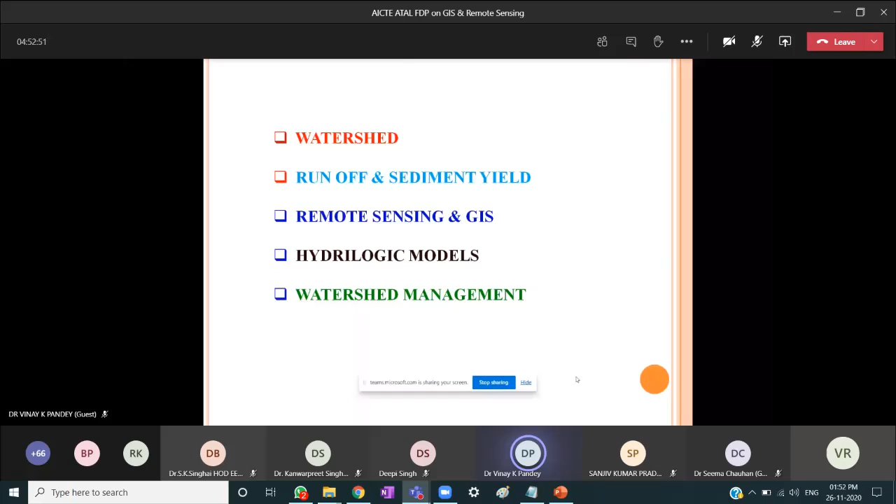So initially, I know personally, about 30 years back, for watershed planning, we were making a contour survey. Then after the contour map, we were generating a soil map, then revenue map, present land use map, and these 4-5 maps we were superimposing at the same scale to each other. Then we were developing a developmental plan. According to the developmental plan, all engineering and agronomical measures were planned. Their engineering designs were established. Their socio-economic conditions were analyzed. Then finally we were executing these engineering structures on the ground.

Now, slowly, on development of the technologies and the concept to execute the things in very less time with high efficiency and accuracy, we could get things like remote sensing and GIS. So when we use remote sensing and GIS technology, we can go for very high level accuracy in a very efficient way and with minimum time.

Now, today I'll not go on explaining the physics and theory of remote sensing. I'm not going to tell you much about the physics and theory of GIS. Most of the students, young scientists, and senior people are well aware of the remote sensing concept, its definition, its introduction, I suppose. Today we'll discuss only the application part of these tools and techniques for watershed planning and its management.

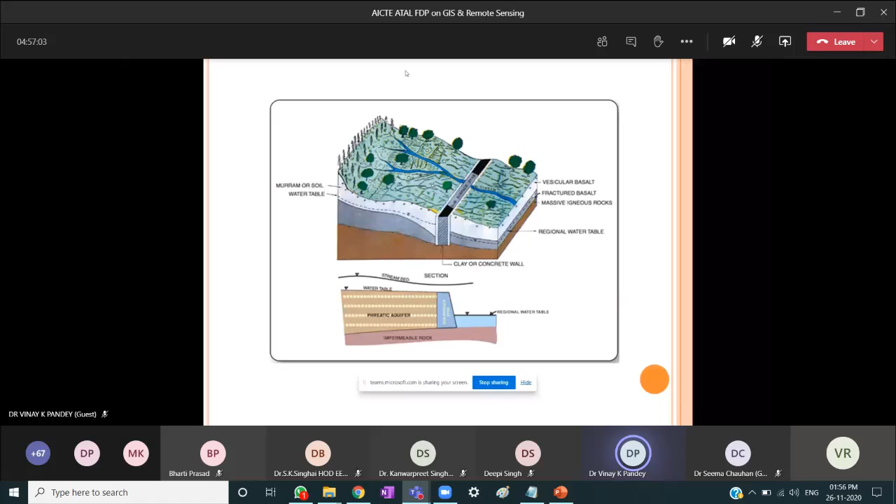Overall, for better conservation of the natural resources, we have to make a combination of engineering as well as agronomical measures. So watershed planning, as already stated, involves management of land, water, energy, vegetation resources with relevant scientific input appropriate to the socio-economic background for a pragmatic development. Ideally, it involves effective soil and water conservation measures, generating green cover such that load-free runoff is generated. Means within the runoff, there should not be much load of soil particles. So this way, a holistic development of a certain region is thought of.

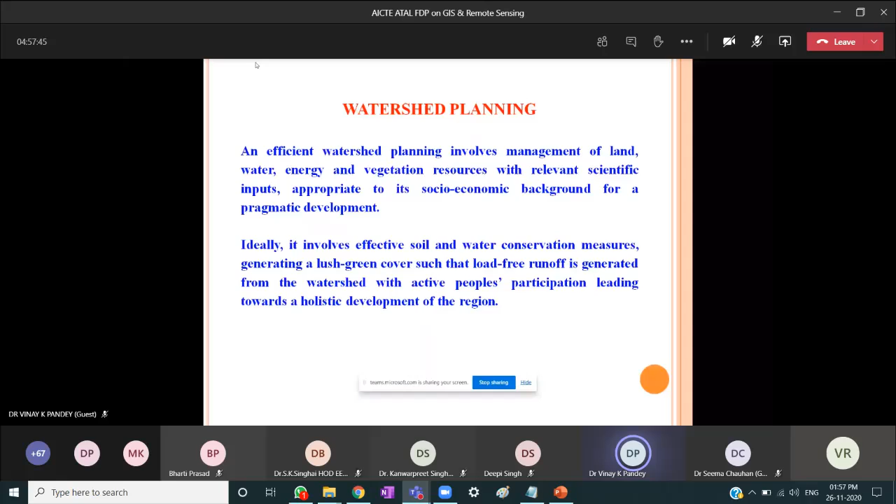So now we need certain basic information for better management of your watershed. So first, as we started with the remote sensing application, we need remote sensing data, in FCC form or digital form based on present availability. Then collateral data: meteorological data, soil data, crop and cropping pattern, vegetation cover, topographical features, present land use, groundwater, socioeconomic. So this way we need a series of data for its better planning.

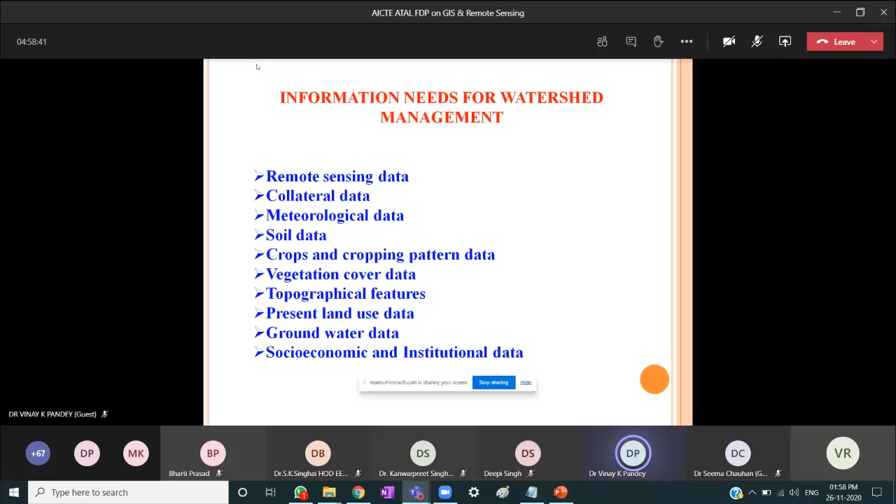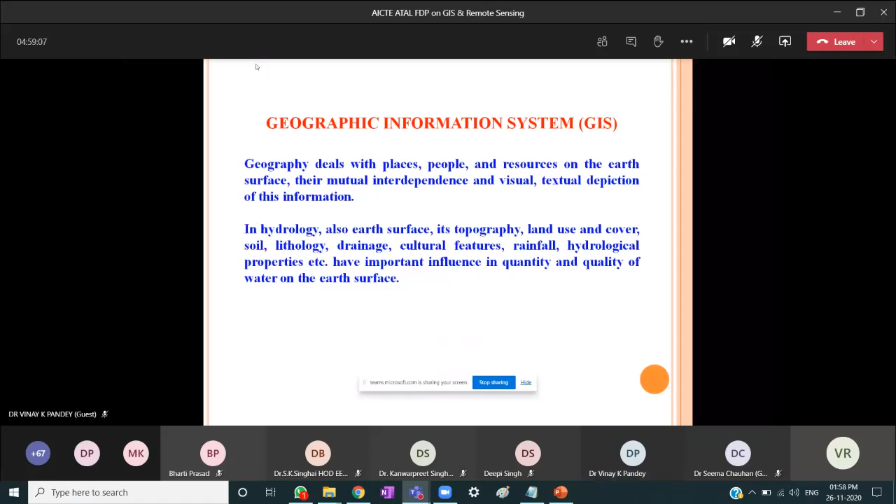Then if we discuss its role, remote sensing data from both aerial and space platforms offers a faster, efficient and reliable data acquisition technique. Remote sensing data have a unique character. It is the same database which is utilized by various thematic specialists, and hence it is of multidisciplinary utility.

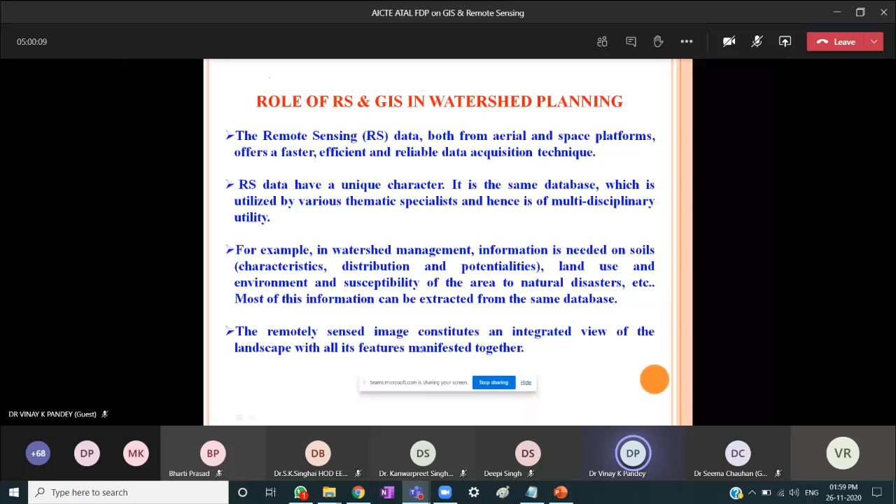Then remote sensing derived information can be merged and integrated with a conventional database using suitable software. Of course, some of the data we can collect from the ground, from the villages, and that information can very well be merged with the data available from the remote sensing images and the ground truth. Then these diverse data can serve as input and can be converted into a consistent map format, and this can be done in a very efficient and time-economical manner.

Then using suitable software, specific integration and analysis of these data can be performed within a very short time period to derive useful output in the form of maps and statistical data. Then GIS serves as an efficient system for compilation and presentation of this information in terms of maps, tables, graphs, etc.

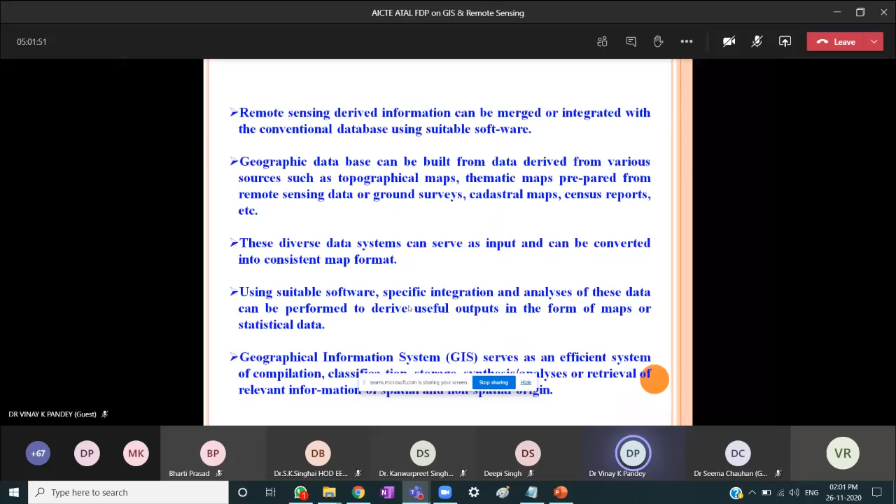So these are the two techniques. If you apply these techniques in watershed management and watershed planning, we can get things in a very timely and efficient manner, and that too with a high level of accuracy. Initially I showed you a picture of a watershed, how a watershed looks. It may be 5 hectare, 10 hectare, it hardly matters. But the broad technical concept is that it should drain at a common outlet.

So in front of you is a 3D view of a digital elevation model, and a digital elevation model is nothing but an outcome generated from the contour map using GIS. So if we develop a contour manually or digitally, we can transfer this database to the GIS platform and we can get a digital elevation model.

So you see, this is the lowest point in the contour. You are having the reduced levels. So this is the lowest. Of course, this is an example of a watershed. So this is the lowest point where water from all corners of the ridges collects and drains. So it has one outlet. Different colors show the different kinds of topographic signatures and features.

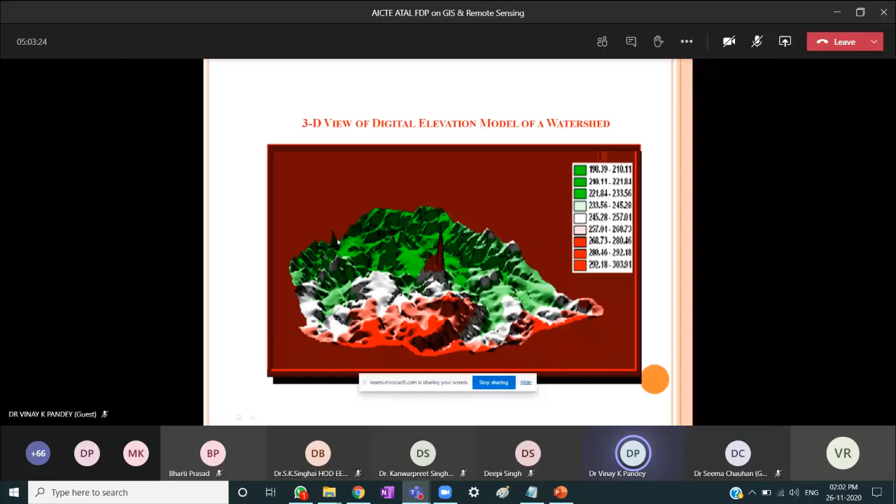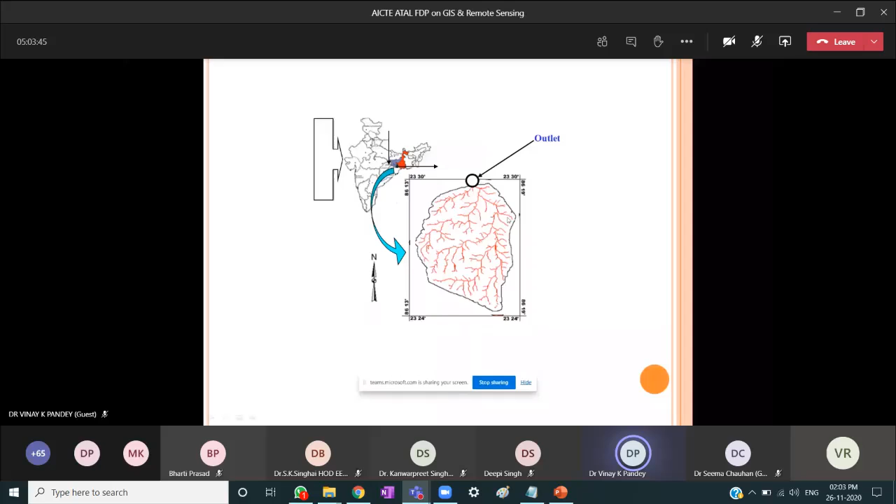Then this is another view of the same map. These are the drainage lines. So in a watershed, this is the outlet, this is the watershed boundary, and these are the drainage lines. Drainage lines are nothing but the pathways through which whatever water falls on the surrounding area drains through these small channels towards the outlet.

So after selecting a watershed, what information do we need to collect and analyze for its efficient planning? First is the location, longitude and latitude. Then what is the average rainfall of that particular area, the mean and maximum temperature, the relative humidity. So in this way, we need to collect the whole climatic information. Then of course we need to collect the topographic map, that is the toposheet.

Then we need to collect the soil map, because it's not possible for each individual, agency or organization to get information of all kinds. So we collect the soil information from the Soil Survey of India. We collect the toposheet from the Survey of India. We collect some basic information at the district and institution level. So this way, to generate different layers, we need to collect different kinds of information.

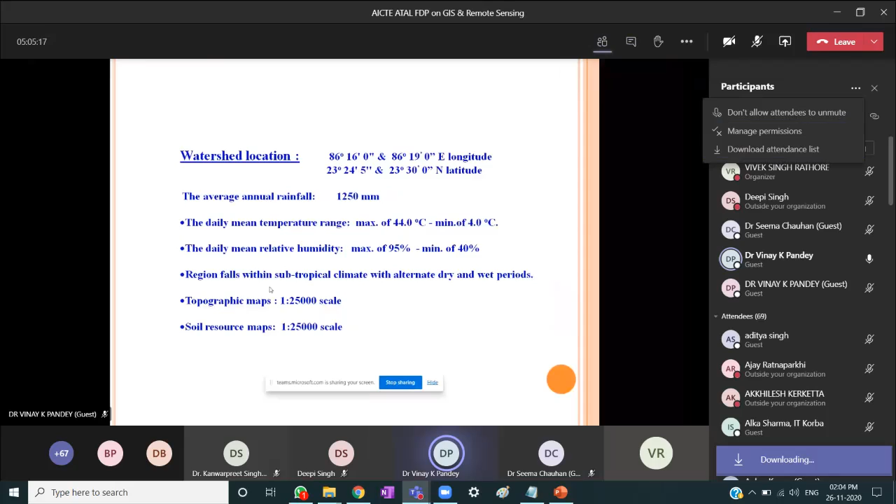So now see how these individual pieces of information slowly come onto a single platform, how they join to develop a developmental plan using remote sensing and GIS techniques. So this is the soil map, right? We collected the soil information from the soil survey.

If the area is big, then we have to collect it from the expert agency. If our area is small, no problem. We can take soil samples, analyze them in the laboratory, and after that we can prepare a map ourselves. So this depends on our capacity and the information and resources that we have with our organization.

So this is the soil map of this watershed area, and you see there are 1, 2, 3, 4 kinds of soils. Sandy loam is there, sandy clay loam is there, loamy sand is there, clay loam is there, and you see the different percentage of each soil. So the whole area is dominated by sandy loam soil, and this map is generated using the GIS platform, ArcGIS.

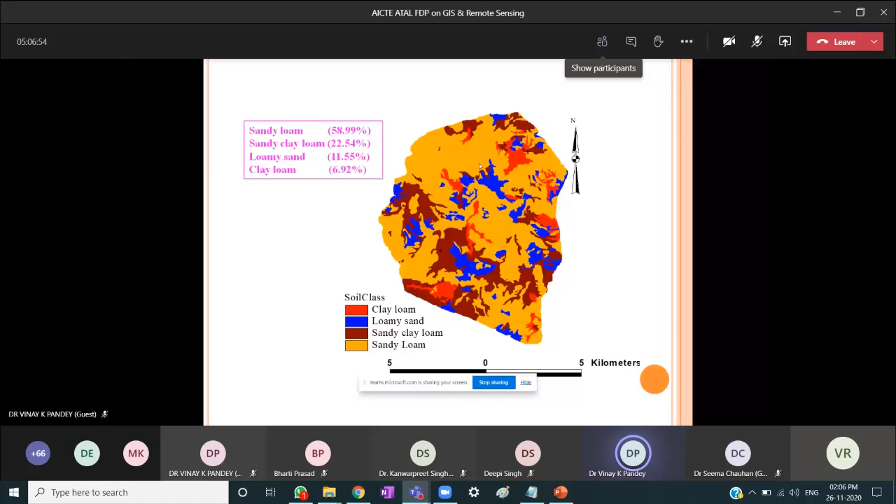So to generate this layer, we collected a soil map from the Soil Survey of India. We digitize, and after digitization, this soil map is generated. Then this is another soil map. We call it the soil series map. So in the soil series map, you see, these are Amara, Dumka, Heusala, Jalika. These are the local names of the soil series.

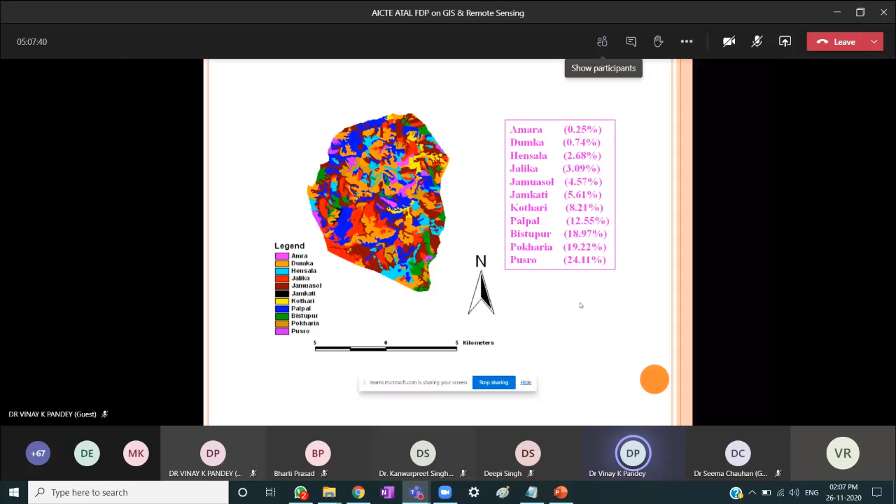Those names were initiated by the villagers some years back. So this is the soil series map, and all series belong to local nomenclature. So the same area has 4 soil classes, but 11 soil series. Then this is the soil class map. You must be knowing the soil classes. In total we have 8 soil classes, and the classification of soil is done based on its property and its suitability.

So here we get 1, 2, 3, 4, 5 soil classes. So class second, we have this much area. Class third, we have 30.69%. Class fourth, class sixth, and class eighth. So class eighth, we have 0.74% area. Means most of the area is suitable for cultivation, or you may say it has good soil. And class eight, which is almost barren land, is not suitable for cultivation. So the percent of that area in the watershed is very less.

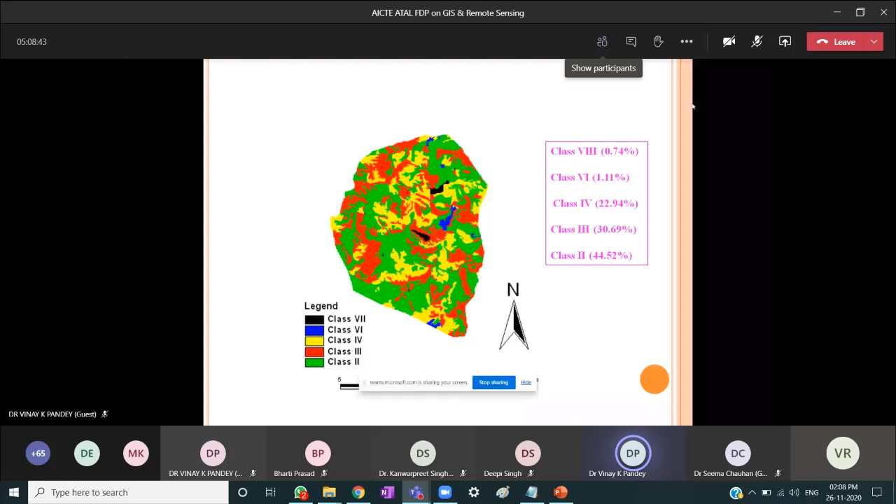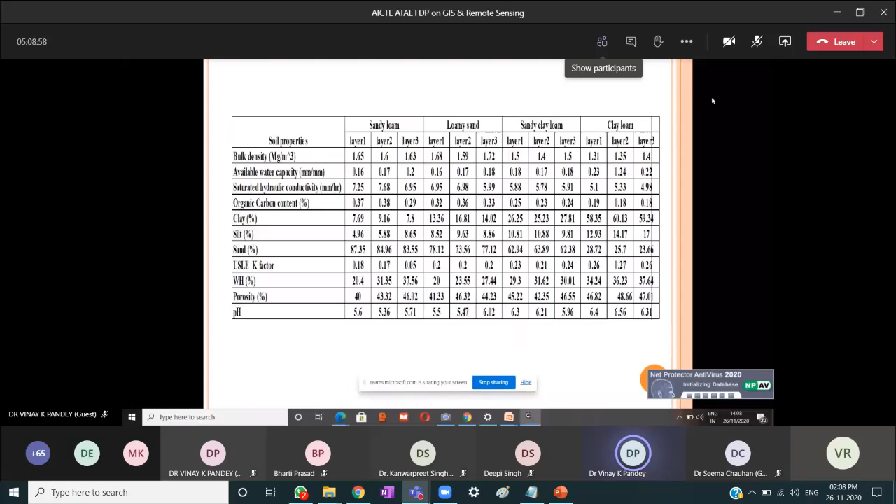So after doing this exercise, we have to analyze the soil properties: bulk density, available water holding capacity, saturated hydraulic conductivity, sand silt clay percentage, K factor, porosity, pH, etc. So for in-depth study, in-depth planning, we have to analyze the soil sample, and all these properties need to be analyzed in the laboratory.

Then another part is crop and vegetation. We have to visit the area. What kind of crops are being grown by the farmers? What kind of natural vegetation is there in the watershed area? So we need to record this information also, because each and every piece of information will affect the total generation of runoff and silt load at the outlet.

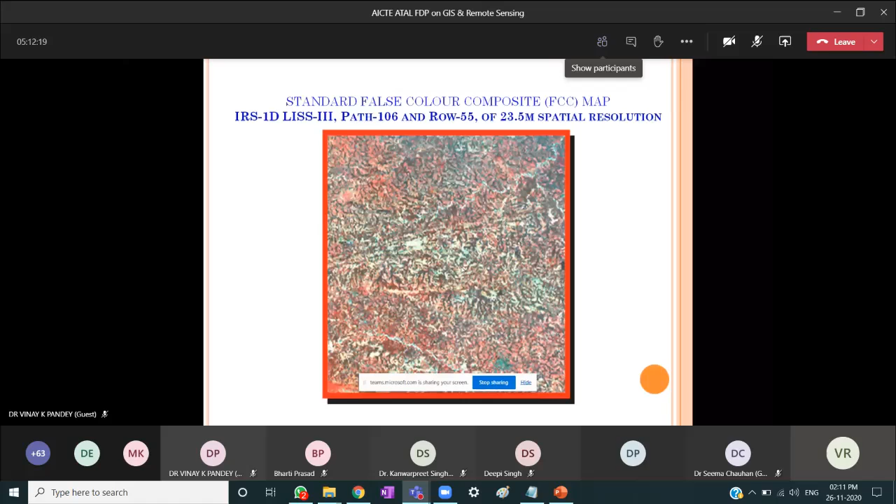We proceed with the digital data, remote sensing data. There are a number of softwares, number of techniques. So for example, if we go for multispectral classification, there are two: supervised and unsupervised. If you go into the theory of supervised, it will take more than a week to discuss. If you go for unsupervised, it will take more than 1 week. So we are not going into that much detail.

The idea is only how to take digital data and go for the classification. So either supervised or unsupervised or a combination of both, we take the images for classification. Then we go for the training stage, in which some statistical classifiers are used. Then the classification stage, the maximum likelihood classifier, we call it MLC, based on the estimate and Gaussian probability. So there are a number of basic theories and mathematical models on which these classification stages depend.

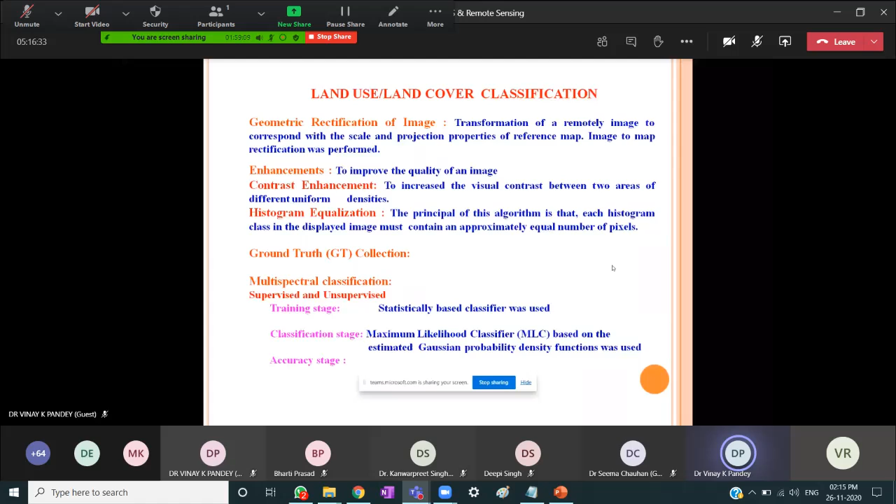So using these software and techniques, we go for the classification of the image, and then finally we go for the accuracy assessment, right? So classification is nothing but understanding or depicting the topographic signature, what is there on the ground. So this way, remote sensing technology is very accurate, is very fast.

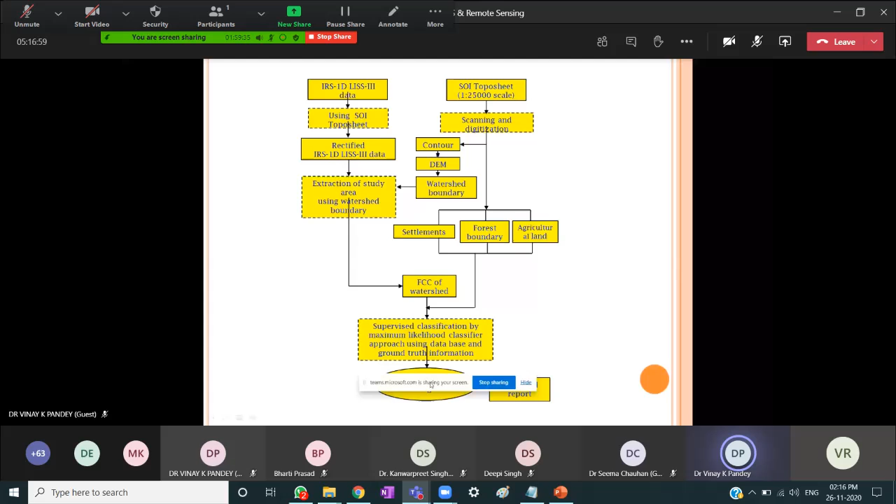So this is one example flow chart showing how we move step by step up to the classification. Starting right from the data, we get the final report and the maps of image classification. So this is the outcome after classification of images. So when we go for very accurate planning, we have to do the whole exercise for two time periods.

One for the calibration and another for the validation, because there is quite a possibility of human error, or n number of chances where there may be slight or more departure from the reality on the ground. So we take 1 year data for the calibration and another year data for its validation.

So this is the land cover classification map for the calibration year. Calibration year may be one pass, it's not the whole year. You must be knowing how satellite data is recorded from our country or from the world. There is a certain period when the satellite moves. It takes the data, that data comes to the ground station, and from the ground station, after certain rectification, it comes. So it's another process. We are not going to discuss the satellite technology. Our idea today is just the application of that technology in our watershed management, right?

So you see, after putting these digital images into the image classification software, we have got such a layer, and this layer shows different signatures: water body, lowland paddy, upland paddy, fallow land, upland, settlement, mixed forest, waste, etc. So after getting this classification, again we go to the ground for random checking whether whatever information we are getting is correct or there is some departure. So based on the ground truth procedure, we can correct this image.

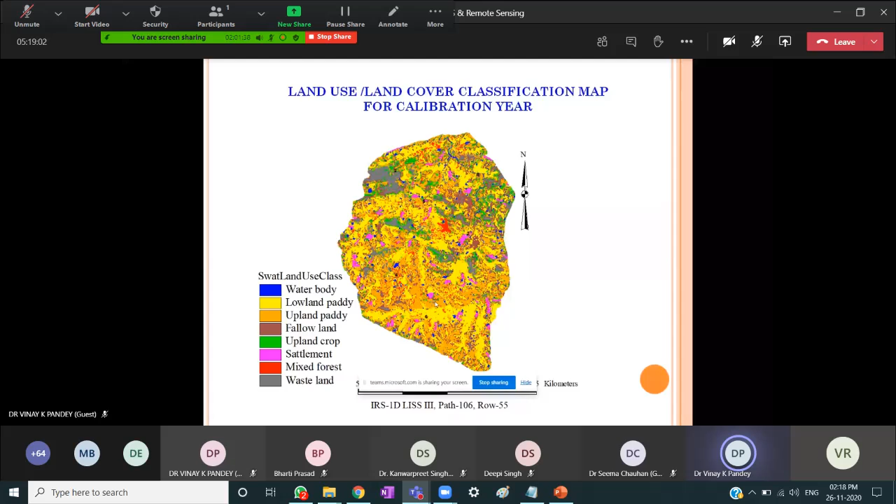Then for another image, for the validation period, we do the same exercise, and after doing this exercise, we go for generating a table. It is called the maximum likelihood report. So through this report, we can get information: for water body, what is the number of pixels, what is the area, how much percent of the image belongs to water body. So this information for the calibration year and another for the validation year.

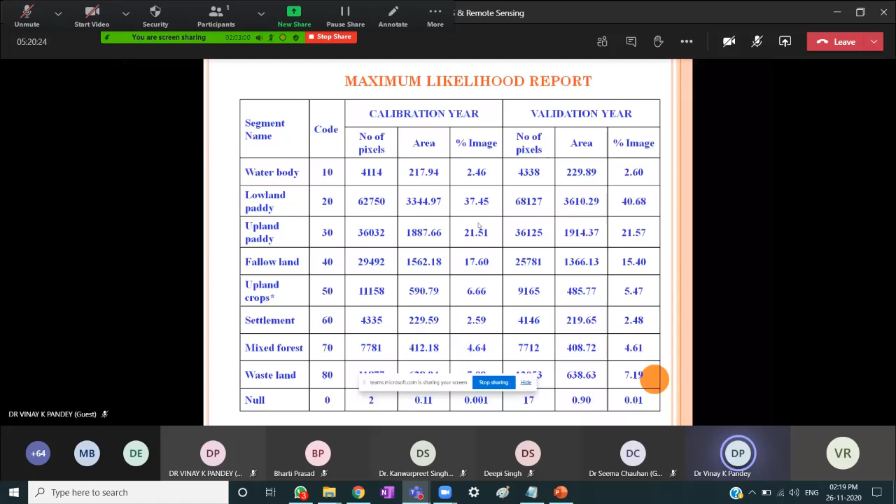So if you see this data area, this way we can say that of the whole watershed, 217.94 hectare belongs to the water body. So this way we can get the information about how much lowland paddy is there, how much upland paddy, how much fallow land, how much villages and city, roads, mixed forest, wasteland. So whatever information is there on the ground, after analysis we can get a precise record of that information through the software and satellite images.

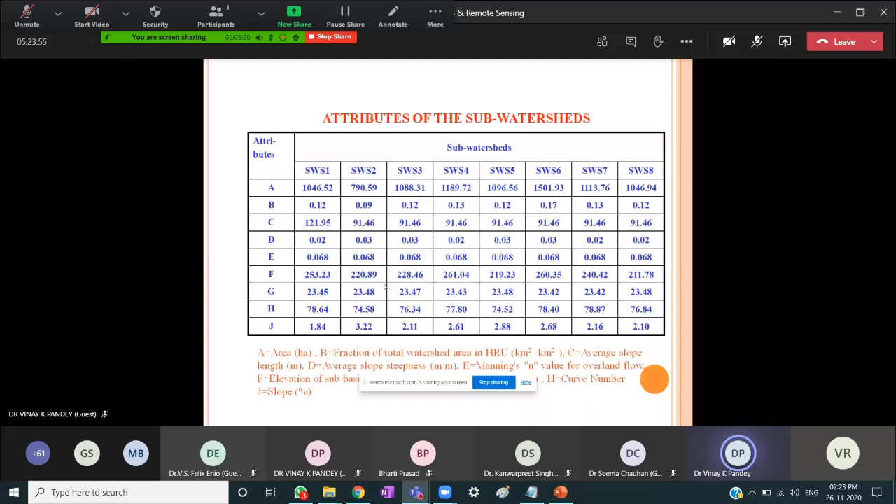Then sub-watershed wise land use and soil distribution. Of course, we need to have a soil map. So this is the soil information, land use cover information of the whole watershed. Then the question comes, we are showing stream order, now we are speaking about the soil. How within the same map? So it is generated because soil layer, contour layer, land use layer, revenue layer, all these layers we generate and superimpose in the same scale. So when we superimpose these layers in the same scale using certain software, whatever information is generated is sector wise, sub-watershed wise.

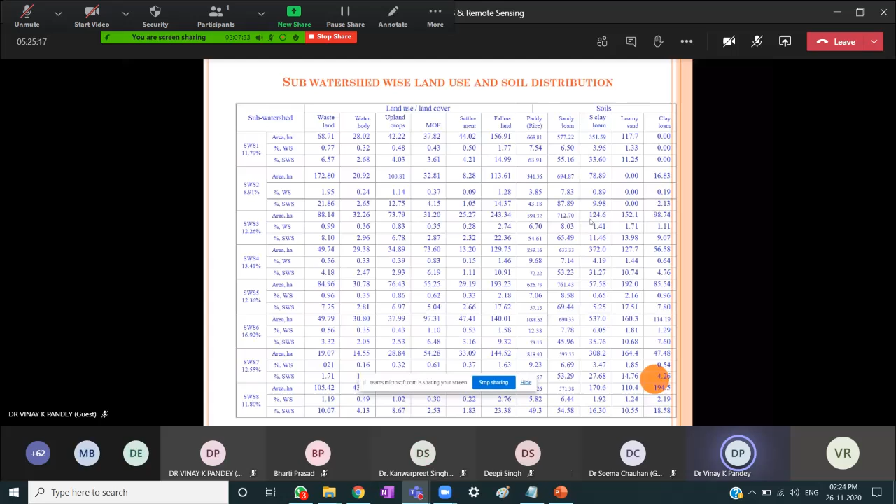So now we can say, for example, watershed number 5. For 5, we will have the area separately, the property of soil separately, the land use pattern separately, the vegetation information separately, the water information separately. And this separation is just for precise planning. So this way, watershed wise, then sub-watershed wise channel attributes. There may be a main channel or a tributary channel through which water flows during the monsoon period. So we have to have all technical information about the channels also, because we have to keep an account, keep an observation of each and every drop of water. That's why the information is required.

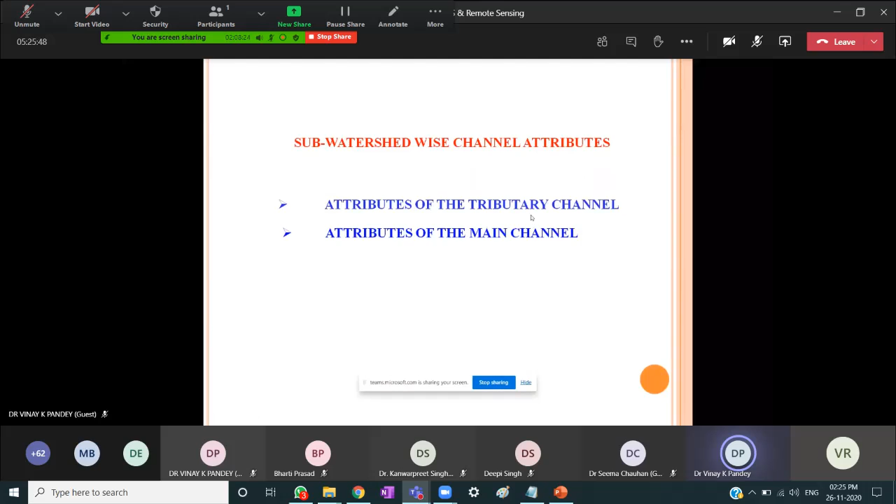Now, it's not the end. It's not the end. Ultimately, we have to get the plan very precise in a very timely manner. So one man is GIS, another man is remote sensing. Then there is a need of a third man. The third man is a hydrological model, and we need a fourth man. We are the fourth man. We are always intervening. We are going to the ground. We are doing ground truth, and we are keeping an eye on the working of these three gentlemen.

So we got the spatial information through remote sensing and GIS, DEM, topographical features, soil property, land use, and some databases like meteorological data and other information that we collected from the ground. This is in the form of images, digital images, and in the form of tables. Then another gentleman gives the spatially distributed information. So this is the information that we collected using GIS, remote sensing, and manual data collection. Then the third man is the hydrological model. So now we have to join them to each other, because ultimately we need a result, some output. To get an output, we do some interface with the hydrological model and whatever data we are getting. Of course there are softwares, there are models, there are provisions.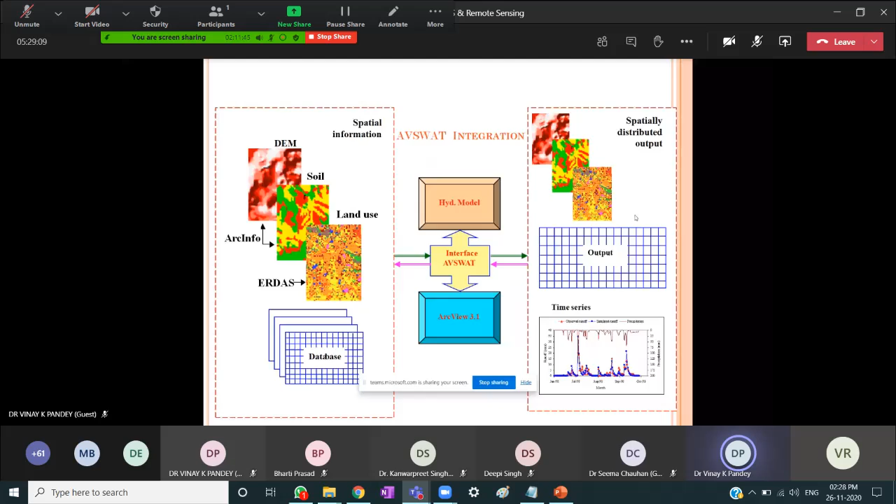Then, one term I use, hydrological model. The model has its own theory: how different hydrologic balance components are there and how they are simulated within the model. This is nothing but the hydrological cycle. Nowadays even kids in KG1 are well aware of the hydrological cycle, how water is coming, how vegetation is there, how water falls on the ground. Some of it creates runoff, some goes as lateral flow, some goes into the deep layers as percolation, some comes as return flow through different layers of the aquifer below the ground. And part of this water goes again as evaporation and evapotranspiration to the sky.

So this way the whole hydrological cycle is working, and within this hydrological cycle, these are the different components on which the hydrological model works to give the value of how much runoff we are going to get from this watershed, how much sediment load, and how much carbon matter we are going to get out at the outlets.

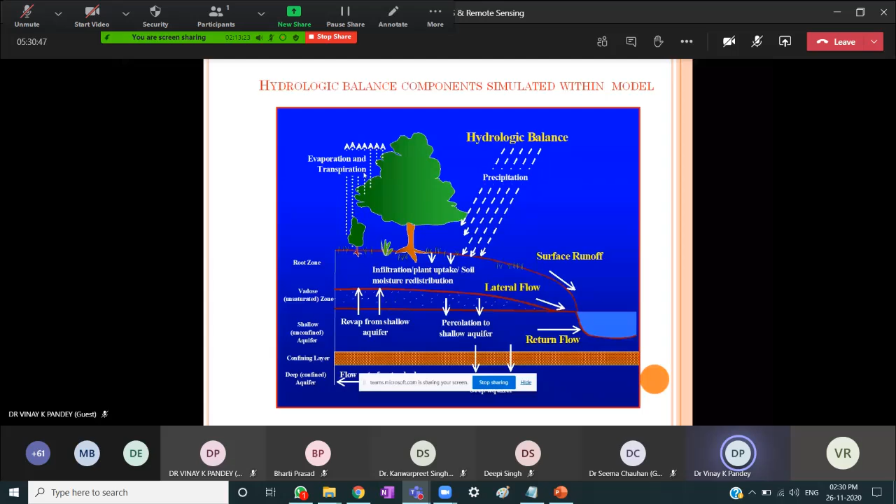So based on that result, we can plan the conservation measures. So one prevalent equation, that is the water balance equation of the model, based on which the whole water balance is calculated. I assume that our young participants, mostly students who are working in the area of water resource engineering and water management, must be aware of this water balance equation.

So I'm not going to go into detail of each and every component, but by and large, soil water content, precipitation, surface runoff, evapotranspiration, evaporation, percolation. These are some of the water balance components that are there in the equation. They are working when we simulate the hydrological model using a GIS and remote sensing interface.

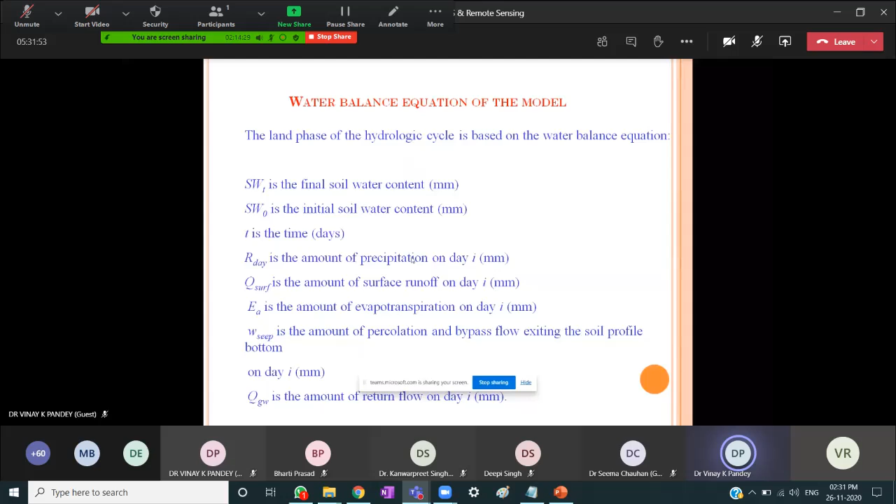Then after doing this exercise, we have to go for the statistical analysis. Statistical analysis for the calibration period and statistical analysis for the validation period, so that after this exercise we can get the difference between our observed data and simulated data. So simulation we are doing using remote sensing, GIS database and observed database, and collected database.

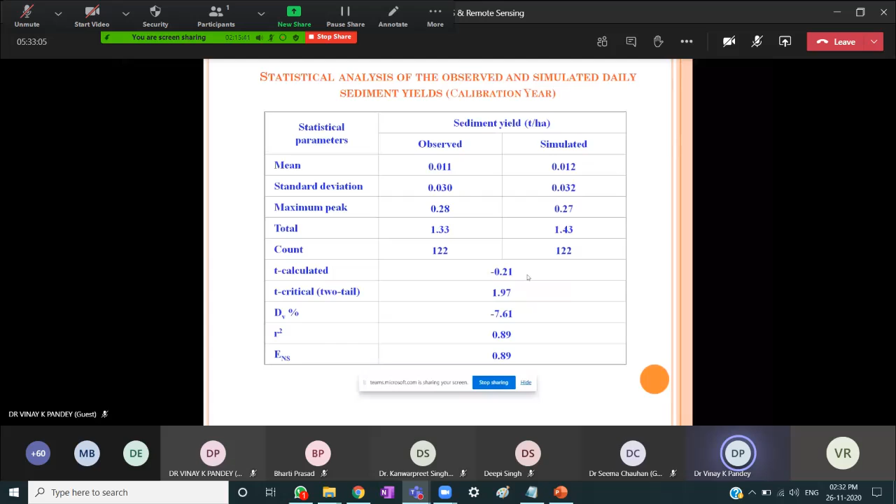Where is the observed database? Observed data means on the ground, different respective departments put their instrumentation for outflow and runoff values. So that value we collect from those departments or from those stations, and that value is then compared with the simulated data, so that we can get how much departure there is, or how efficient our simulation is when we compare with real ground data. And this exercise we perform for the validation period as well as for the calibration period, for both periods.

So after sedimentation, we have to go for a similar exercise for the runoff also. If you go to the stations where runoff and discharge data are recorded, we have to collect those data, maybe 10, 20, or 50 years, and keep that data in another track. And after simulation, we have to compare our simulated data with the observed one. Through these techniques, tools, and software, we can compare the values. When we are sure there is a very strong relation between observed and simulated data, based on that information we can go for further planning.

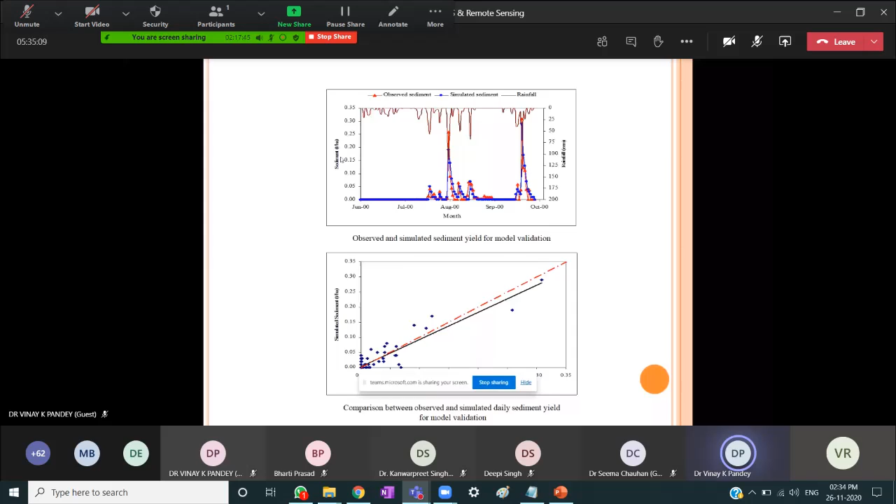After simulation, we are going to get two pieces of information: sediment at the outlet and runoff at the outlet, because we have to conserve the runoff water and we have to conserve the soil. And once we conserve and manage the soil and water in the watershed, all management techniques will work perfectly, whether it is agriculture development or vegetation development. So, as I told you, water and soil are the key terms in watershed management, and with proper collection, information, validation, and calibration of these two, we can go for perfect planning.

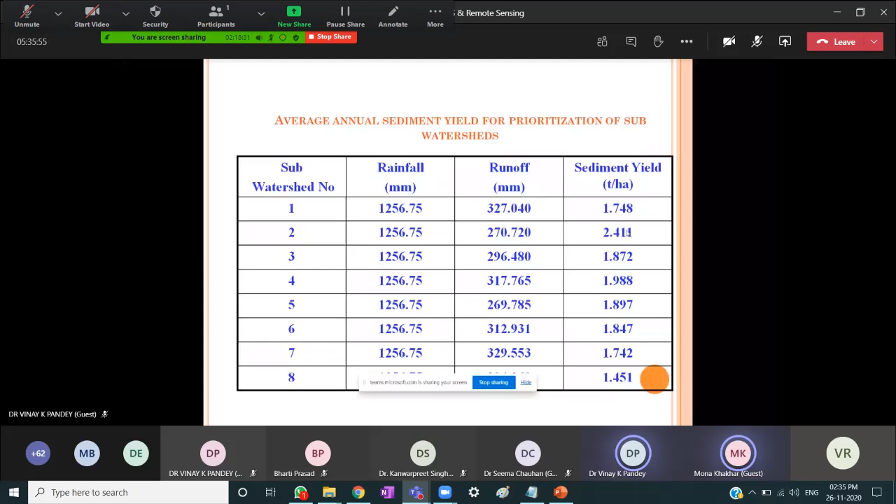If the observed value and simulated value have a close relation, then we go for the simulated value, because we are going to have a plan for the coming 50 years. It's not for 1 or 2 years. So planning for 50 years should have a very strong and accurate database.

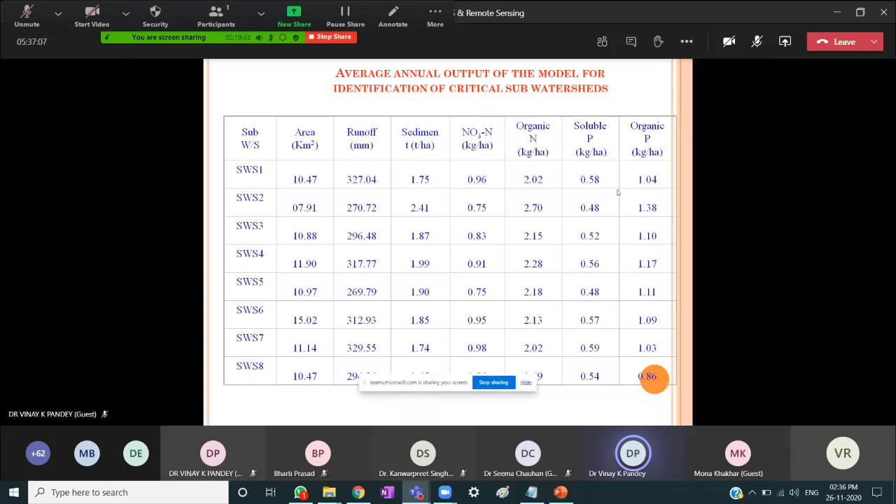So this is the idea about recording the data of each subwatershed, all information. Then similarly, crop information, how many crops are there. We visit the ground, we make a ground survey of which crop and how much acreage of that particular crop is there.

Then what is the status of this crop in producing runoff? What is the status of this crop in producing the sediment yield? And all these parameters. So this way we have a relation of different crops with the production of sediment yield and discharge of runoff. So this information we have to collect.

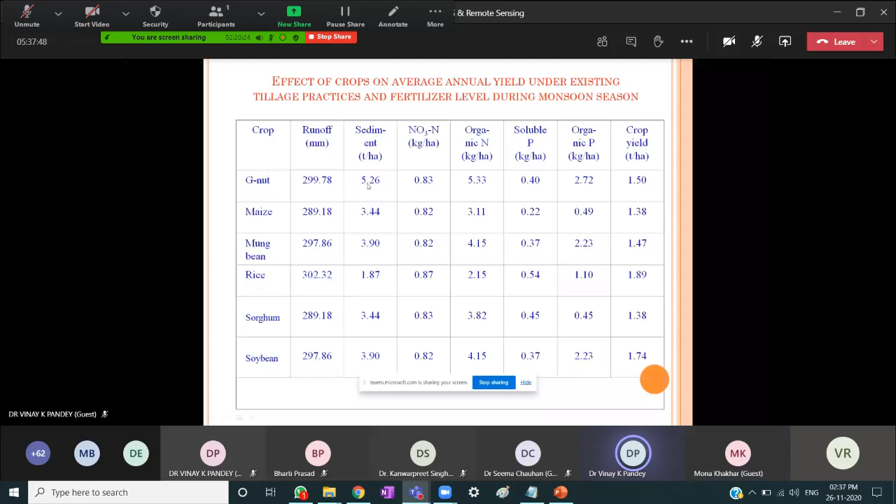So similarly, we can simulate in the model the effect of different tillage on sediment and runoff, simulation of different tillage practices and yield of nitrate, nitrogen, soluble P, organic, etc. So after getting all the information, runoff, sediment, organic matter, nitrate, nitrogen, soluble P, there may be other parameters also, but as an example I have tried to convey these values, based on which we can go for perfect watershed planning.

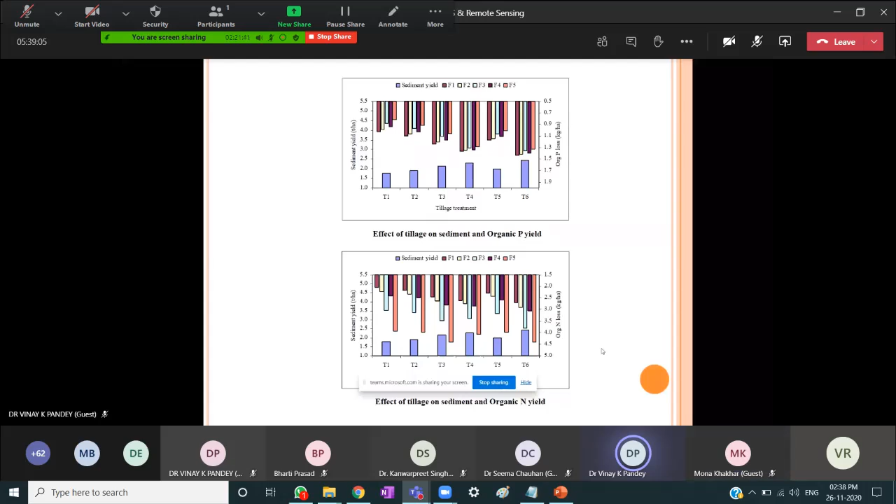So this way we can say there is a big role of remote sensing and GIS technology, in combination with a hydrological model, for efficient and accurate planning of watershed. Then after doing this, we can put some 2-3 conclusions. The usefulness of remote sensing satellite data for obtaining highly dynamic land use, land cover information on a spatial scale is high. Then the model's ability to simulate a number of different processes and its link with a GIS interface have great potential as a tool for predicting sediment yield.

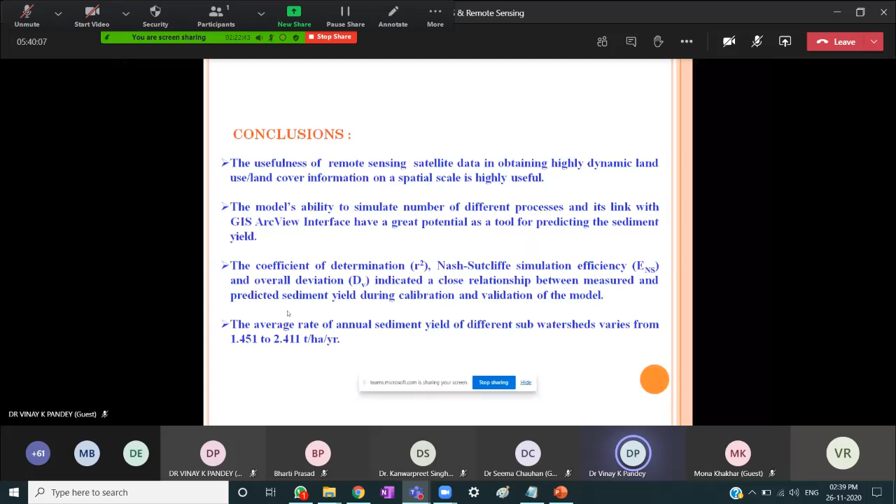Then similarly, for the statistical calculation, the coefficient of determination, Nash-Sutcliffe coefficient, and overall deviation are some components that show the accuracy of our process. Then the average annual sediment yield from the case study I am presenting is 1.45 to 2.4 tons per hectare per year. Then out of 8 watersheds, after doing the exercise, we declared which watershed is the most severe for treatment.

Because out of 8, there's no equal distribution of runoff, no equal distribution of sediment yield, no equal distribution of discharge of NPK and all these chemical and organic components. There is always variation in all components. So this way we can predict which watershed has the highest severity, meaning maximum sediment load discharge and maximum runoff discharge. So this information tells us we first have to treat watershed number 2 because that is more severe. So this exercise gives an idea of which area we have to start our execution from.

It's not like, let us start from 1, let us start from 8. No, it's not like this. This information shows which area needs immediate action for execution. So this way we can prioritize a scheme based on application of remote sensing and this model for the ground reality, and the model was used successfully to identify critical subwatersheds for developing best management practices.

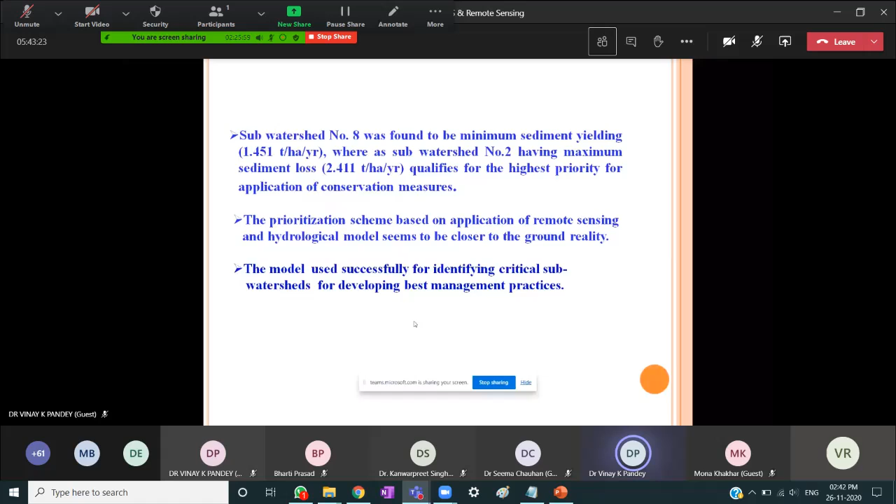So within a few minutes, I will sum up. These are some engineering and agronomical structures, especially for watershed management. Normally we know dams, rivers, aqueducts, but these are small structures specially designed for watershed management: gully plugging, contour bunding, gabion structures, percolation tanks, check dams, cement plugs, nala bunding, recharge shafts, dug wells, groundwater dams, subsurface dikes, and other structures designed by farmers, innovated and even named by local people.

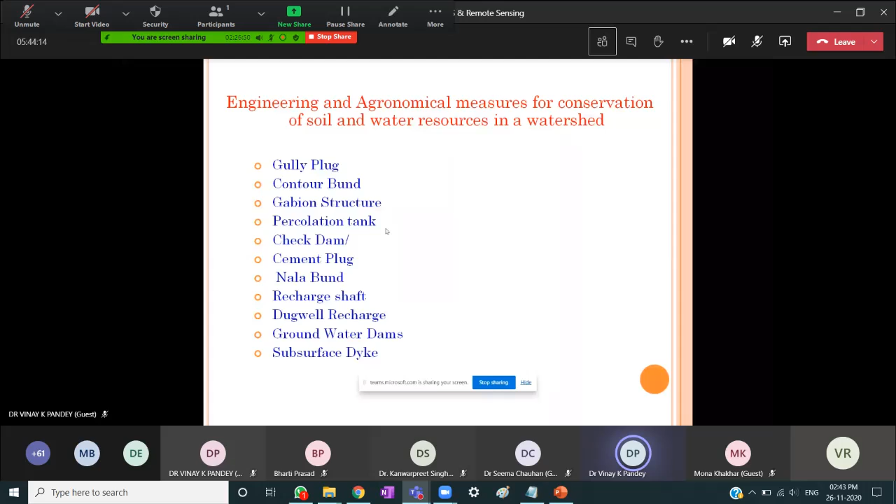So this is just a view of, say, a part of a watershed. These are the drain lines. How gully plugging is done: a small gully is there, so we are putting a gully plug structure. It may be made of local boulders. In watershed management, we hardly go for any big pakka structure. Mostly we design structures which are made of locally available materials, stones.

Then, of course, this is a stream. Water is coming this way. So how one barrier can be created so that during the monsoon, the running nature of water can be diverted into the walking nature, and any water which is retained on a certain ground for a longer period will percolate deeper and recharge our ground strata. So at once there are 2-3 processes that take place.

If we make the speed of runoff slow, then erosion will be controlled. Once erosion is controlled, the top productive soil will be retained where it is. If the speed of runoff is controlled, that water will get more opportunity time to stay in that particular area, and certainly our groundwater recharge will be more. Another good thing is that due to less erosion, enlargement of gullies and creation of new gullies will be reduced. So 3, 4, 5, 6 processes take place at the same time during the monsoon period.

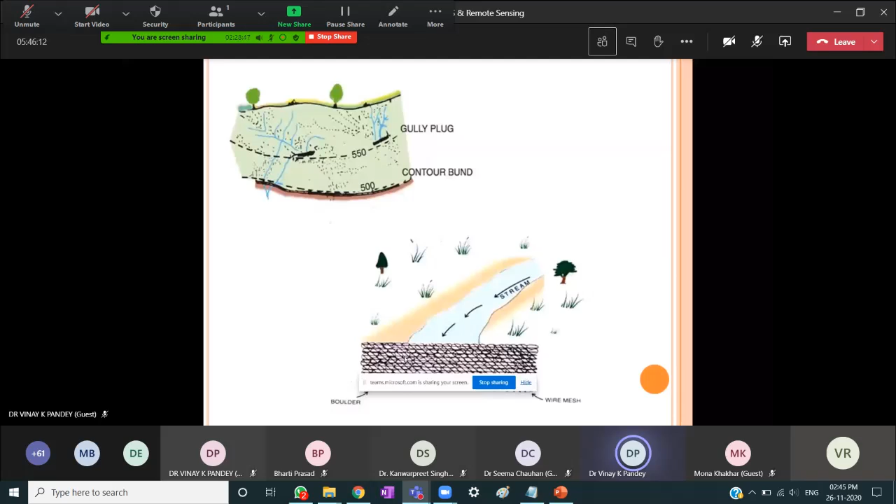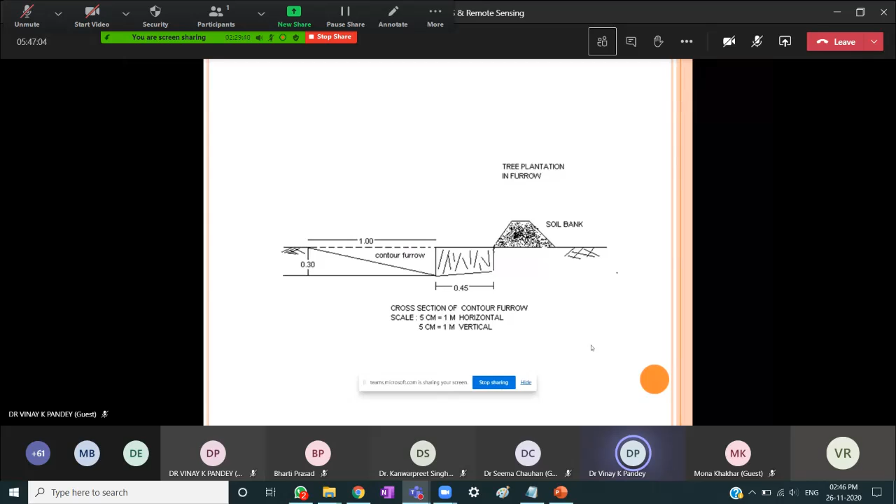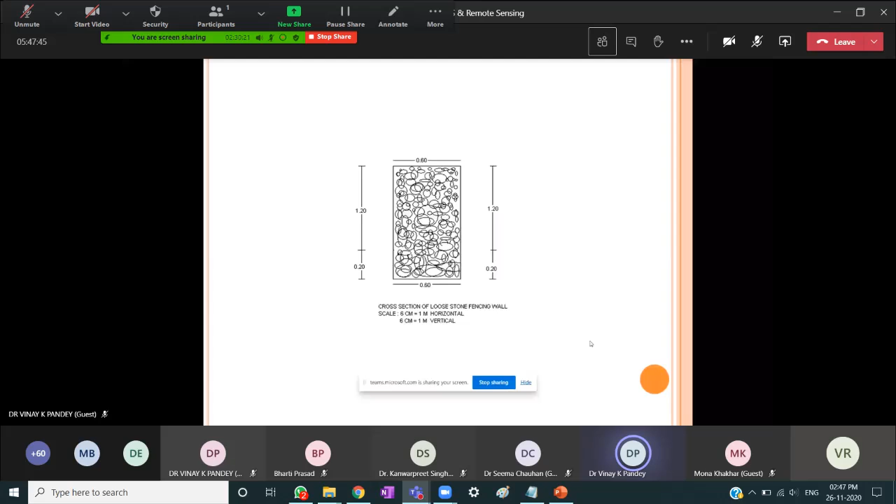A grass waterway is just disposing the water safely in the onward direction. Suppose we have created a check dam, a small dam. When the water comes out of the waste weir, sometimes we forget it and let it go. No, if you pass this excess waste weir water through a grass waterway, it will prevent the topsoil from being removed and the disposal will be very safe. It will not damage the farmers' crops downstream. So this structure is also very useful in watershed management.

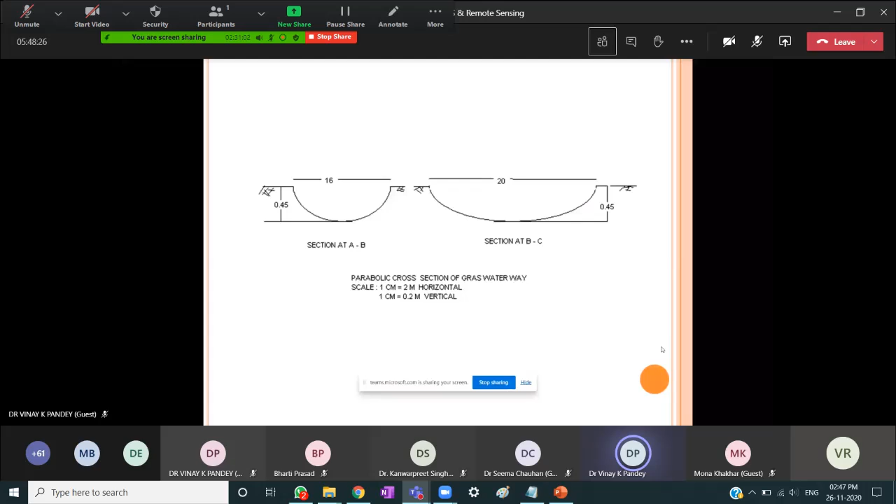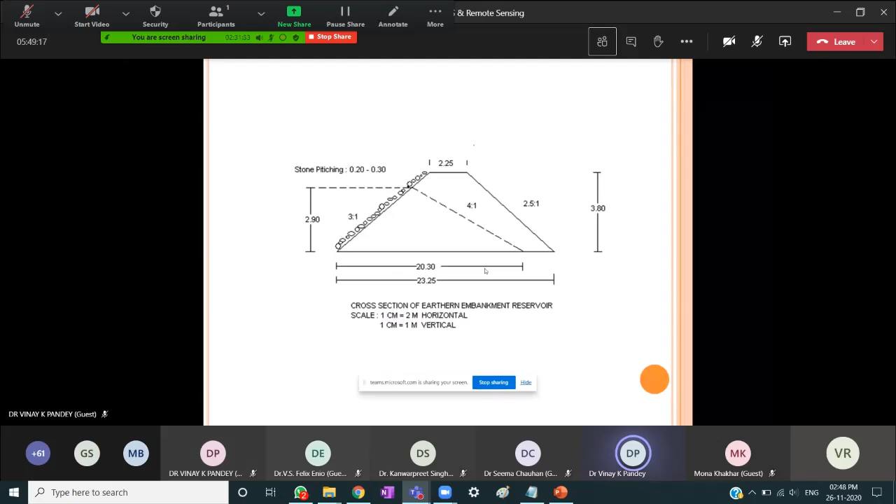Then the loose stone terrace. Again, where stones are available, mostly in hilly areas, we design a terrace made of loose, locally available stones. Then this is an earthen embankment, or the kachcha dam. We have seen in a lot of places, even rural, a number of government schemes where check dams are designed. But an earthen dam, where there is some combination of available funds and topographic situation, the earthen dam will serve our purpose. So this small structure is designed for watershed management.

Then contour bunds. Where the slope of cultivated fields is less than 6%, there is still a possibility of erosion; water can move. So if we go for contour bunding, we can cut the slope, and once we cut the slope, the speed of runoff is reduced. Erosion of topsoil will be prevented, and within a few years the whole field will slowly be flatter. Once topsoil is retained, the fertilizer is retained on that field itself, so crop production and vegetation will improve.

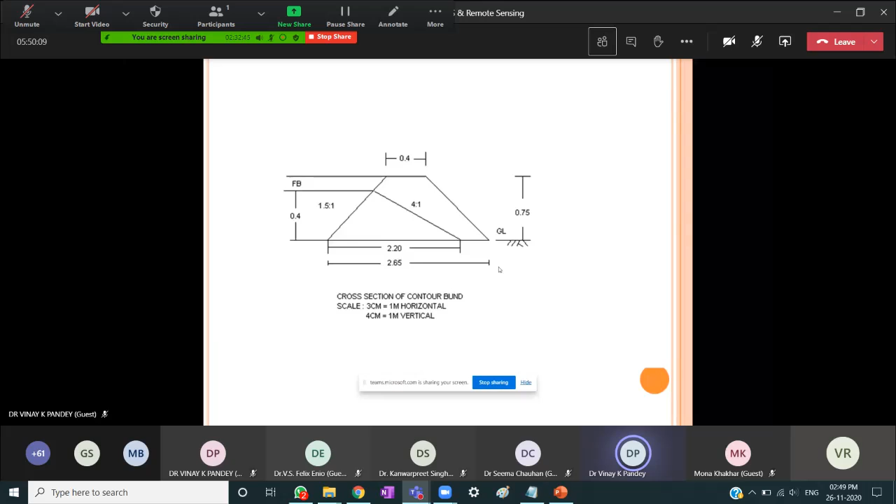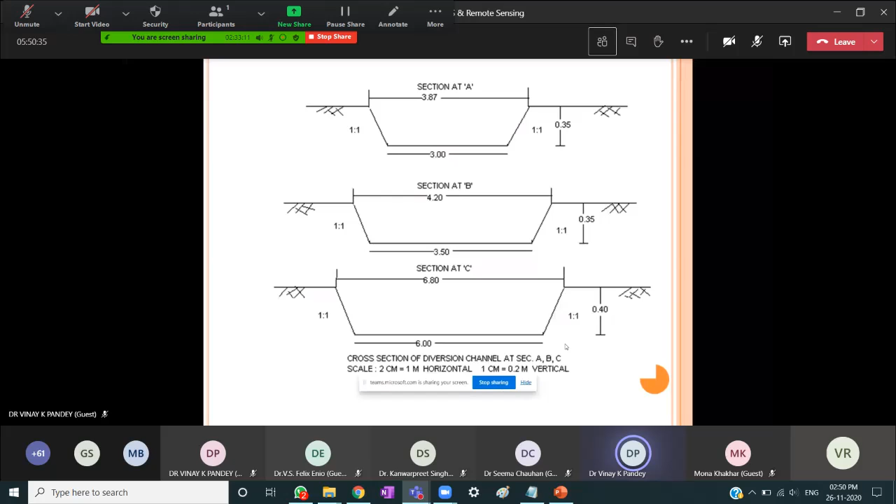So this is one of the structures designed for the cultivated land. Then diversion channels. This is required in the watershed area in the villages where we get excess water, whether it is during rainy season or in another season. So put the diversion channels for safe movement of water and avoid damage of farmers' fields, farmers' crops with excessive flow.

Now, these are some pictorial diagrams which are mostly used in watershed planning, watershed management. So, as I told you, there are two kinds of structures. One is engineering, another is agronomical. So, these are the engineering pakka structures. Agronomical measures are nothing but plantation, crops, and cropping pattern. All vegetative kinds of measures come under the agronomical measures.

So these are the nala bund. This is another anicut. So see, this one gully is coming, and by putting this small structure, we can retain some water, we can retain some soil, so that further enlargement of this gully is reduced, and after certain water is ponded there, it will recharge groundwater also. It will fill up.

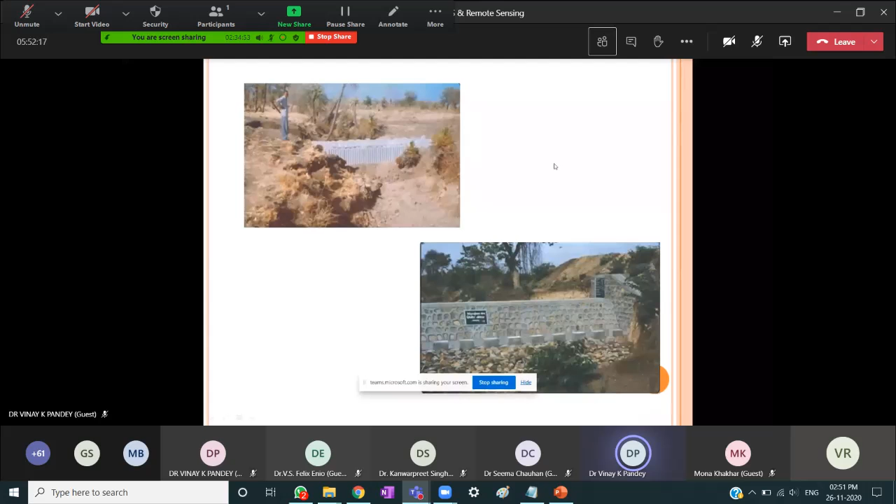Sometimes there are cases in the villages, once a small structure is filled up with soil, people say, no, this is wrongly designed. No, it's not like this. The purpose of each and every structure is not ponding the water only. First year, second monsoon, there may be pondage of water. But if after the third monsoon it is silted up completely, even then it serves its purpose. So in rural areas, on a small scale, if a small structure is silted up fully, its purpose is solved, because it has stopped the erosion of excessive soil and enlargement of dimensions of the gully.

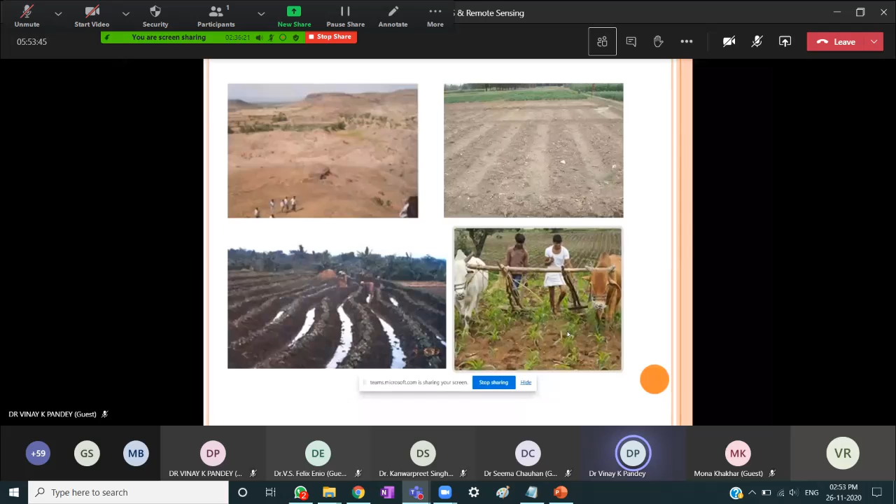Similarly, see, there are no engineering structures, but still there is a change in the cropping pattern. If, based on the slope and topography, we are not advising the farmers to take certain crops, plow your field in a certain direction, technically this would be wrong. And in the longer term, there may be excessive erosion or loss of topsoil. Ultimately, it will reduce the crop production and productivity.

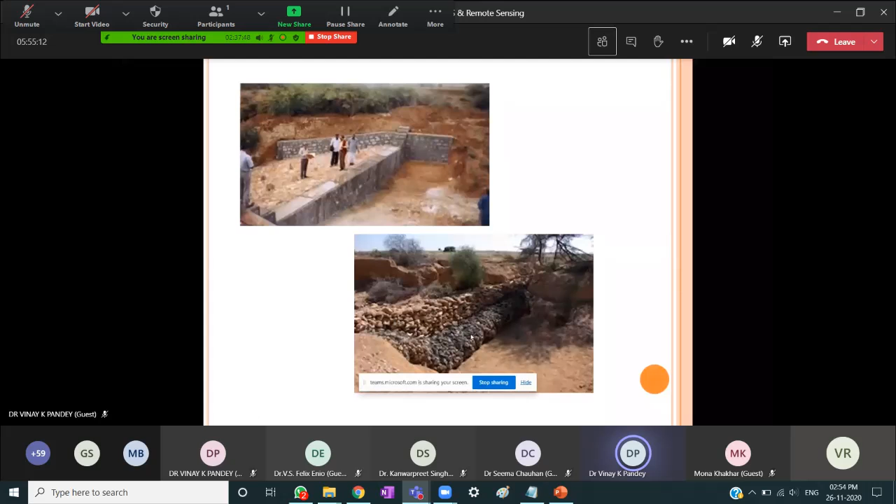Of course, these are some structures made in the nala, some locally available nalas, small rivers. See how side walls are created using these small locally available stones. There are no pakka structures. So the idea is these are some small-scale, low-cost structures that serve the purpose of reducing runoff and soil loss.

Then you see in the forest area, if this locally available boulder structure were not there, there is a good possibility of heavy runoff and heavy detachment of soil around these plants, and within a short period all this vegetation may go. So within the forest area, even a low-density forest, with small available material we can collect, the structure can be designed so that the flow of runoff is reduced and maximum soil is retained where it falls. See, this is totally wasteland.

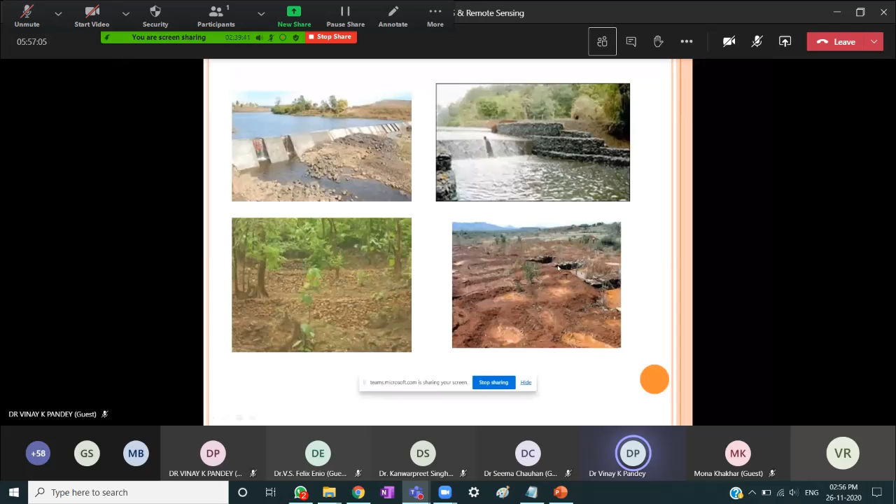On the wasteland, we are putting some ditches for the plantation, and a gully is there. So this gully is treated with small boulder structures at different places, so that further enhancement of this gully can be reduced, and whatever depressions are there, in due course of time, they will be filled with the soil.

Other boulder structures are there. They are in the forest land. So in a similar way, we can reduce the velocity of runoff water and retain the soil for better growth of vegetation. We have all seen this in different places.

Some ponds are there. Normally, it is technically advised that in 1/10 part of your cultivation land, one should go for a small farm pond. The small farm pond is not randomly created. It's already designed based on our previous data: what should be its depth, its height, its berm, its inflow, its outflow, how much capacity, how much water, depending on the crop requirement we can use for irrigation. So this is another structure basically used in the watershed area.

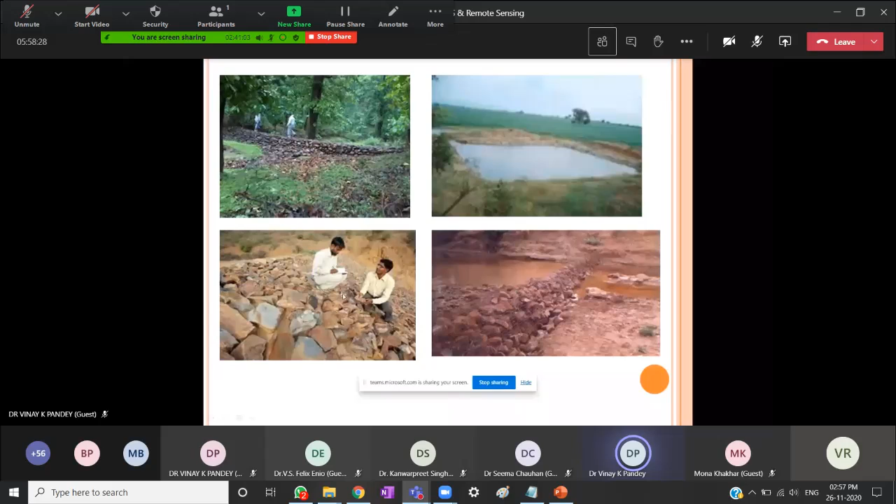See another picture. A small nala is coming. So a mesh wire structure is there. This mesh wire chain-link wire is there, and locally available material is there. So we can retain some water and retain the valuable topsoil which is coming. So those were the cases or photographs of forest land.

This is the grass waterway I was telling about. This is all cultivated land, but whatever excess water is coming during the rainy season should be safely disposed to prevent harm to farmers' crops from the excessive velocity of flowing water. This is another structure. Some plantation is there, some crops are there, but still there is a small pond created for the storage of water and groundwater recharge.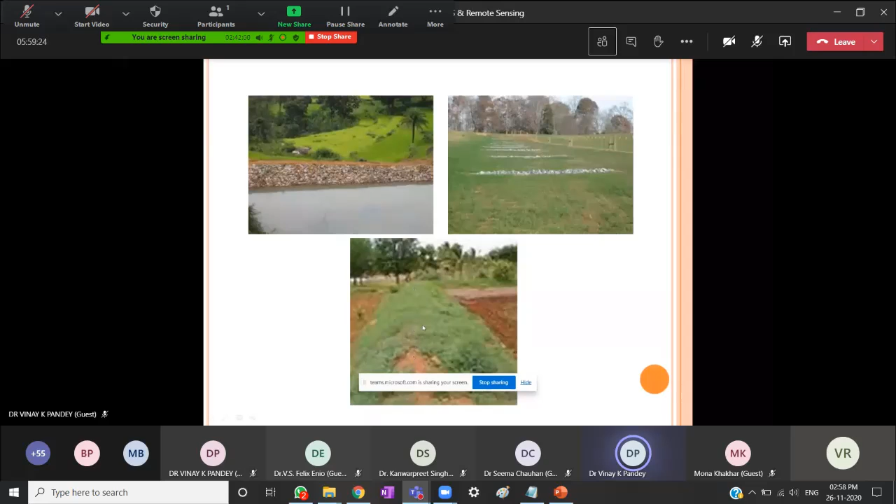Similarly, there is another treatment. Some field bund is there, and the farmer is advised to take some crops on the bund so that topsoil can be prevented from detachment through raindrops. Another photograph in a hilly area: some terraces have been created, and on these terraces farmers take some crops. At the same time, some soil and water is retained, and this way we can recharge the availability of water. Forest land is also treated this way.

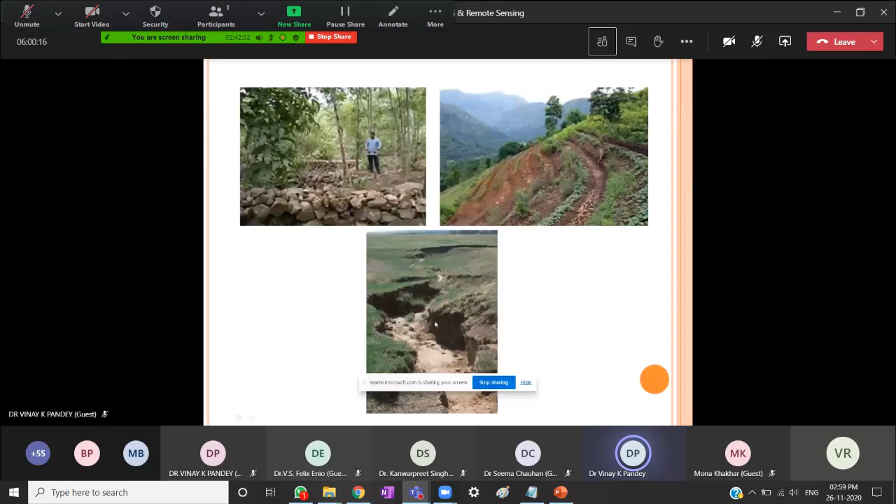Another way, we can see this is not cultivated land, but its slope is not much, so we can plan for grass plantation. Then in between two rows of plantation, one can go for vegetables and other things. So this way, such land can be planted based on the total availability of runoff and soil loss and nutrient loss. We can plan a mixed cropping pattern for the farmers.

Of course, as usual, this is another pond in the sloped area. See, it is locally made, even by the farmers, and life-saving irrigation can be provided to the nearby crops. This is very high sloped land. See how a gabion structure is created. There's no cement, no rods, nothing. Only available local boulders and wire mesh. This structure can be designed for a particular location.

Then these are a series of structures, because one gully, one valley cannot be treated effectively using only one structure. So instead of using one structure, along the gully we can put such a series of structures so that water and soil both can be retained, and once water and soil are retained, certainly vegetation will grow and vegetation will also be retained in that particular area.